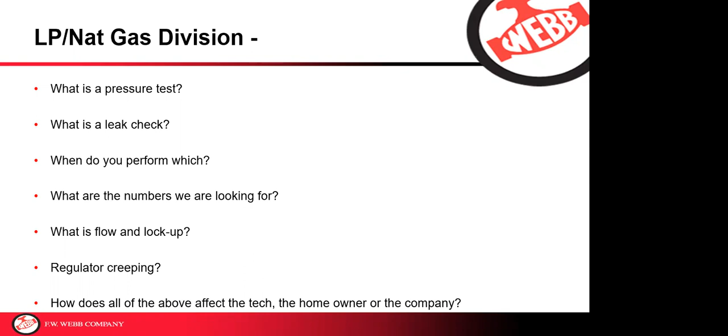The topics we're going to cover today are: what is a pressure test? What is a leak check? When do you perform each? What are the numbers we're looking for? What is flow and lockup? We'll also address regulator creeping and how all of the above affect the technician, the homeowner, and your company.

We're going to start with a small video from PERC, Propane Education and Research Council, which, just to let you know, you have great assets within these organizations, PERC, as well as others we'll talk about shortly.

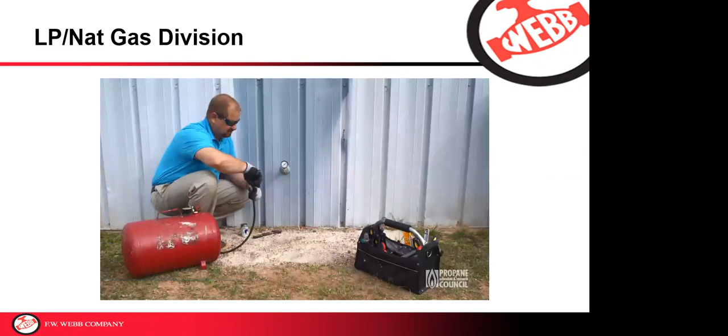The purpose of conducting a pressure test is to make sure the interior gas piping holds pressure while being subjected to an elevated pressure. The test is performed downstream from the point of delivery and prior to appliances being attached to the system. Typically, a gauge is connected to the interior piping stub-out location. The test must be performed using air or an inert gas to pressurize the system and then monitoring the pressure with the gauge. If a gas shutoff valve is installed and subjected to the pressure, be sure it's rated for the pressure being applied to it.

After a successful pressure test is completed on a new gas piping system, a leak check is required at the time propane is introduced into the piping system. A system leak check is necessary to make sure the gas system is free of leaks.

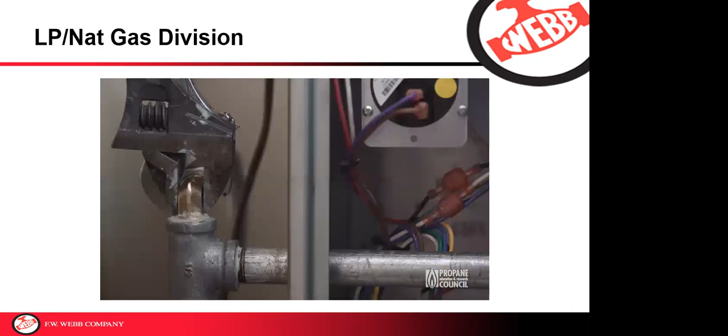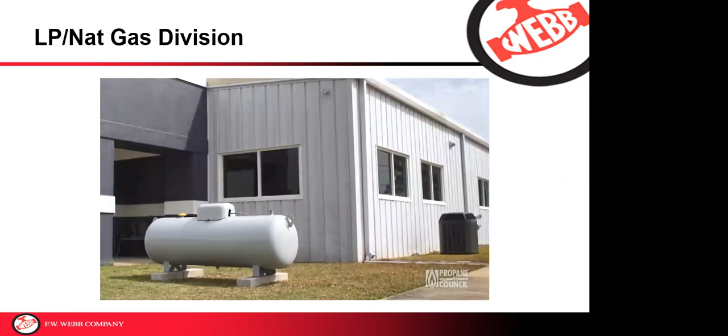Here, the technician is using a water manometer to conduct the leak check. However, there are other devices as well, such as the Magnehelic pressure gauge shown in use at the water heater. Before a leak check is performed, the appliances need to be connected to the gas piping system. The regulators need to be installed, and the gas piping needs to be connected to the propane container. Be sure to follow code requirements and your company policy when conducting a leak check.

If a leak is indicated by a drop of pressure during the leak check, a leak test is performed by applying a leak detection solution to the pipe fittings and connection points of the gas system. A leak detection solution will bubble to indicate the presence of a gas leak in the system. An electronic leak detector can also be used to detect leaks. Never perform a leak test with an open flame source.

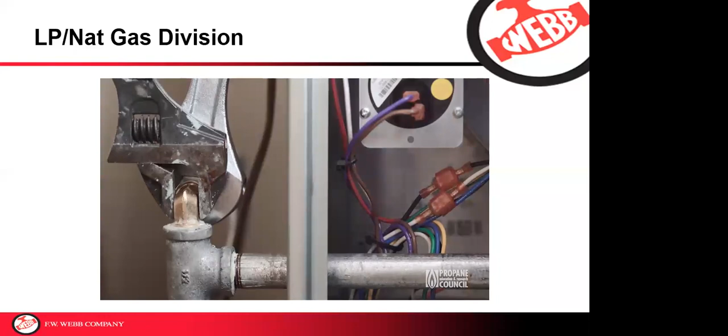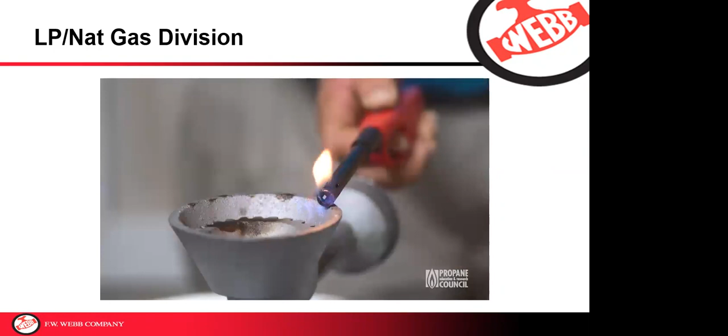After a leak is repaired, another leak check of the gas piping system is performed to verify the rest of the system is free of leaks. After the leak check is complete and the gas piping system has been purged, the appliance is ready to start up. The service tech is able to perform gas piping system flow and lockup tests with the same manometer position.

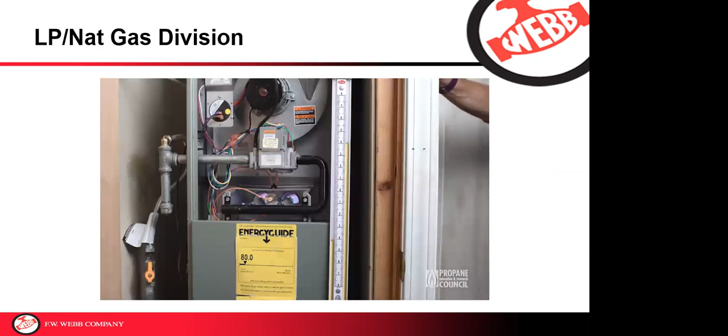Flow and lockup tests are typically performed on gas piping systems during startup to determine if the gas piping system and regulator are sized correctly for the intended BTU load, and that the regulator properly stops the flow of gas when there's no more demand on the appliance.

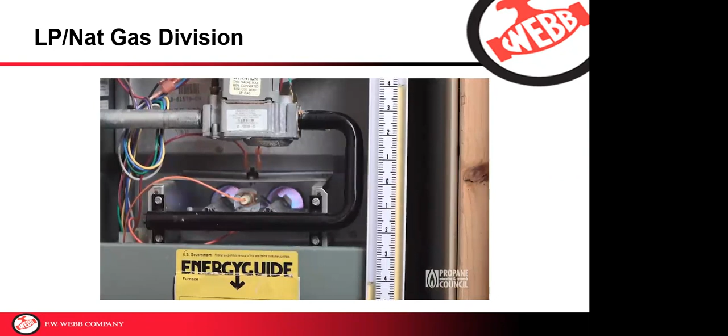In this example, the appliance inlet flow pressure is too low, as the furnace manufacturer, in this case, requires a minimum of 11 inches of water column pressure at the inlet. When the pressure is too low under flow conditions, the technician will check the pressure at the second stage regulator, usually mounted at the exterior building wall.

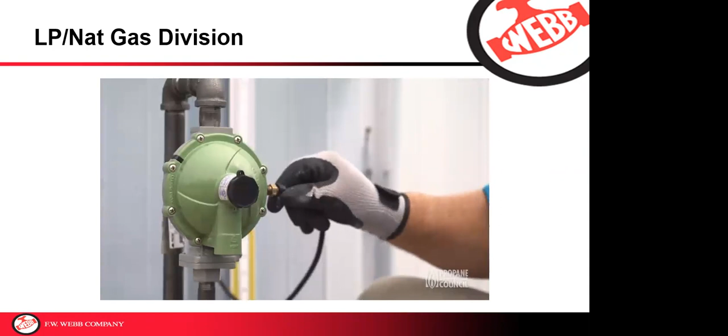Here, the service tech is using a manometer at the second stage regulator outlet to perform the flow pressure test on the interior portion of the gas piping system to verify a possible issue with improper interior gas pipe sizing, indicated by failed flow and lockup tests at the furnace.

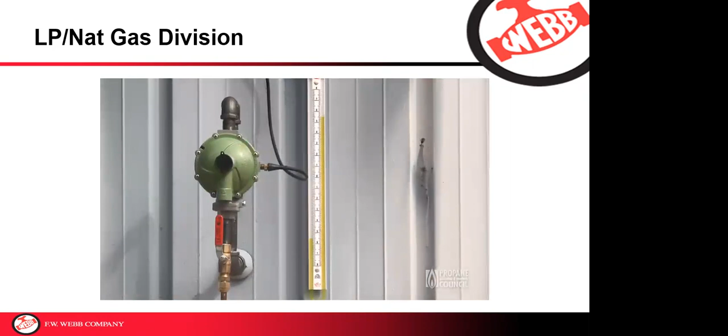In this example, the manometer check at the second stage regulator indicates it's supplying 11 inches water column to the building piping. Considering that 11 inches water column is normal pressure and the pressure is much lower at the appliance, a possible interior pipe sizing issue is indicated. All system checks and tests should be documented according to your company policy.

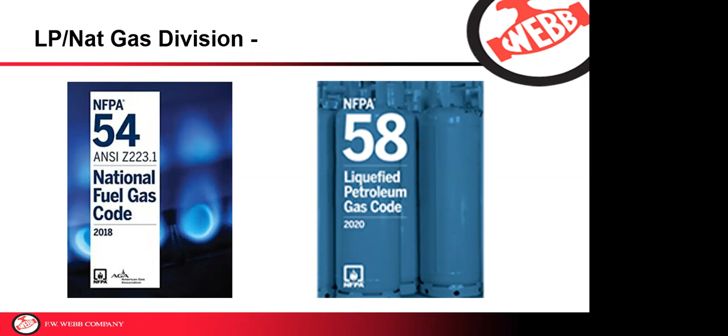Also, what we're deriving our information from is both NFPA 54 and NFPA 58.

First thing we're going to talk about is a pressure test. NFPA 58, by definition, describes that as an operation performed to verify the gas tight integrity of a gas piping system following its installation and/or modifications. In 6.13.3, it states that piping within the scope of NFPA 54 shall be pressure tested in accordance with that code. So make sure you're following each code, 54 and 58. And 54 is very specific when it comes to pressure test.

In leak detection from NFPA 54, Chapter 8, we have to keep in mind they're very specific about what we can use for our test medium. The test medium shall be air, nitrogen, carbon dioxide, or an inert gas. Never use oxygen for this test.

8.1.4.2 tells us that the test pressure to be used shall be no less than 1.5 times the proposed maximum working pressure, but no less than 3 psi, irrespective of design pressure. So even if you have a low pressure system working at 11 inches of water column, NFPA 54 tells us you must use no less than 3 psi.

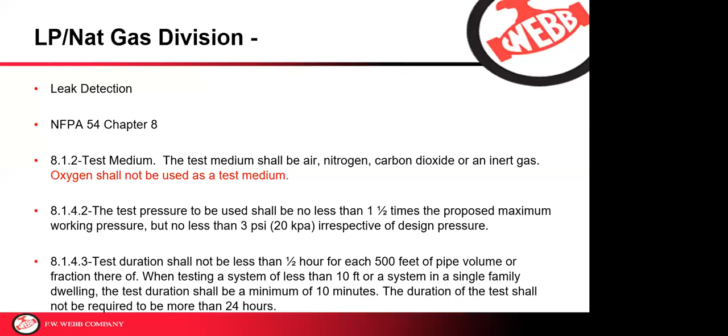A leak check by NFPA 54 in Chapter 8 says that is required immediately after gas is turned on into a new system, or into a system that has been initially restored after an interruption of service. Piping systems shall be checked for leakage. Where leakage is indicated, the gas supply should be shut off until the necessary repairs have been made, and then you must leak check again. So what is an interruption of service?

It could be a number of different things. Of course, a runout. If a customer loses pressure in the propane tank and they call you for a delivery, that is a runout and a leak check is required. To protect yourselves and your company, document your leak checks, as well as pressure tests for that matter.

Another interruption of service would be, for instance, if homeowners at a seasonal home decide they don't need their gas on while they're away and they shut it off. That does require a leak check. So somehow you've got to let your customers know that that is required.

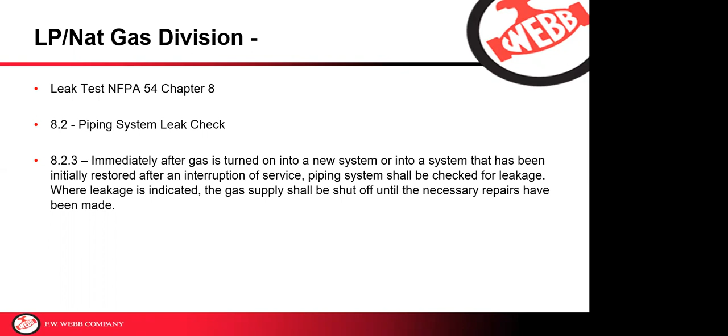Here shows a number of different leak check and pressure test pieces of equipment. It's highly recommended that your technicians have some of these things. The first one on the left is a simple low pressure gauge, reads up to 30 inches of water column - there's a couple of them there. On the bottom left is what we call a serviceman's friend. It's a great, inexpensive tool, and that's going to help your technician or driver tie into the system in a number of different places.

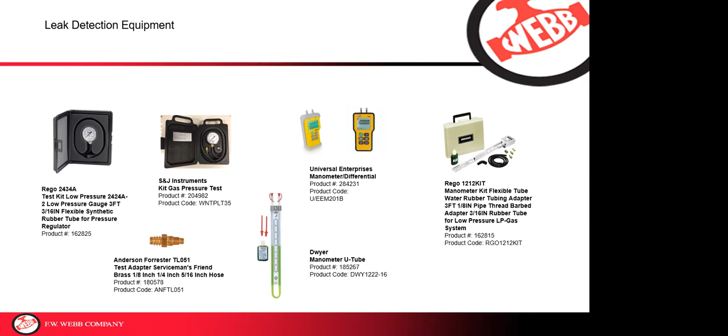Right in the center, those yellow pieces of equipment are digital manometers. Those are great, but keep in mind they do have to be checked for accuracy occasionally, so read the instruction manual from the manufacturer as to the intervals. The U-tube manometers are a great tool, and they don't lie. Unlike the gauges and the digital manometer that have to be checked occasionally, these U-tube manometers, as long as you zero that manometer, it is an excellent tool. And FW Webb carries every one of these pieces of equipment and others.

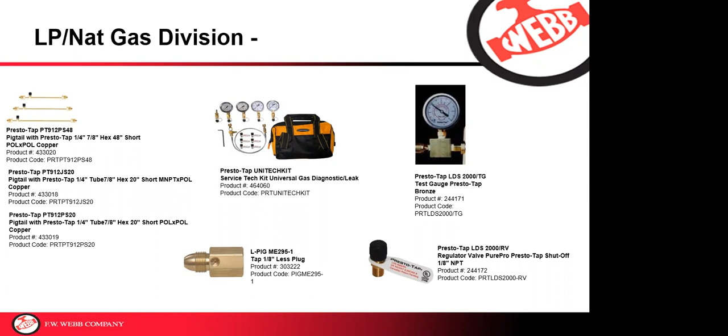In the center is a Presto Tap Unitech kit. We call it a Universal Gas Diagnostic and Leak Kit. This comes with a whip and 4 different gauges: a 300-pound gauge, a 30-pound gauge, a 5-pound gauge, as well as an inches of water column gauge. It's great for a technician, they really come in handy, and again you can tie into the system anywhere you'd like. The others are just some other tools available to you folks for your drivers and or techs.

A must-have on a service truck or delivery truck is a leak detection solution. These leak detection solutions are non-corrosive, which is very important. Do not be tempted to use anything else. Any cleaning agents have chlorides that can deteriorate the pipe or tubing, so make sure you're using a non-corrosive leak detection solution. You can use either the brush type bottle or a spray bottle.

These are a number of different gas sniffers. We have these available, they're a very handy tool to find that leak. If you're doing your leak check and you find that there is a leak, these will really help you locate that leak, repair it, and then again test that system. Very important, and document.

This RegO LP Gas Serviceman's Manual is a great tool. In it, besides line sizing charts, there are descriptions of how to do proper line sizing using the longest length full load method. There are also excerpts from NFPA 54 and 58 on how to perform a proper leak check at different parts of the system. So it's a great tool, and if that's something anybody needs, please contact your local FW Webb and we can provide them for you.

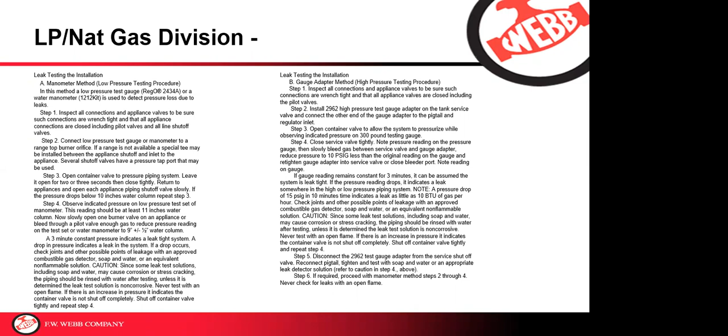Disconnect the test gauge adapter from the service valve, reconnect the pigtail, tighten, and test that connection with your non-corrosive leak detection solution. If required, you may want to proceed with the manometer method that we spoke of earlier.

This slide talks about the high pressure test method with service valves equipped with a pressure test port. Again, inspect all connections and appliance valves to be sure connections are wrench tight, that all appliance valves are closed, including pilot valves. Install your pressure test gauge on the test port downstream of the tank service valve seat and upstream of the pigtail and regulator inlet.

Open the container valve to allow the system to pressurize, observing the gauge reading on the 300-pound gauge. Close the service valve tightly. Note the pressure reading on the pressure gauge. Then, as we said before, slowly bleed out 10 psi off that tank pressure. Retighten the gauge adapter into the service valve or close the bleeder port. Note the reading and document it. If gauge reading remains constant for 3 minutes, it can be assumed the system is leak tight.

Just as our last high pressure method, we're going to follow the same rules. Check the joints and other possible points of leakage with an approved combustible leak detector or non-corrosive leak detection solution. Never test with an open flame.

Just as in the other tests, if there's an increase in pressure, it indicates the container valve is not shut off completely. Shut the container valve tightly and repeat. Now disconnect the test gauge from the service shutoff valve, or leave it in place if desired. If the gauge is removed, plug the opening and check it for leaks.

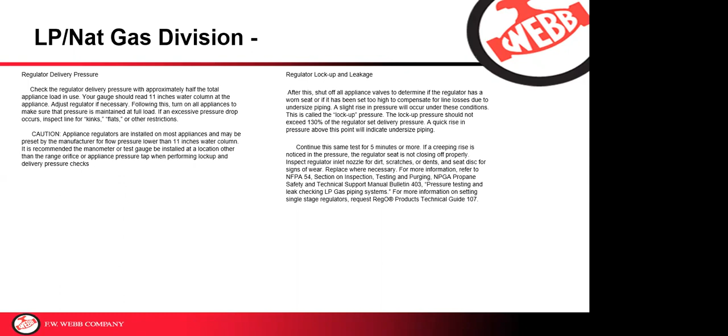Some things we're going to discuss: how can what we have discussed today affect you? How about your customer? How about the company you work for? What we've discussed really is all about safety and protecting yourself. In the event there happens to be an accident at a particular home or business, you performing these tests and checks properly and documenting them can protect you, and it's very important that we protect our customer as well.

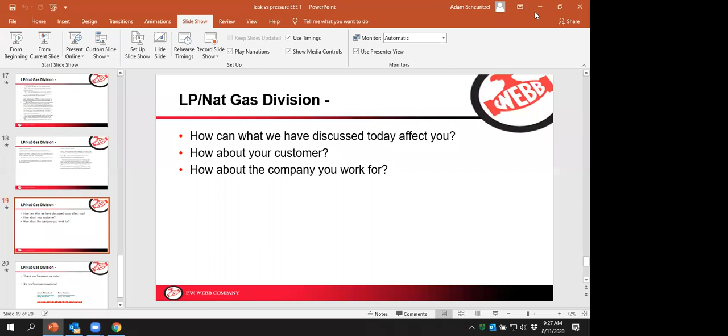We're about to show you a video that's going to describe, we're going to talk about pressure testing, perform leak checks, and perform flow and lockup. I apologize for the technical error. Here we go, that PERC offered us.

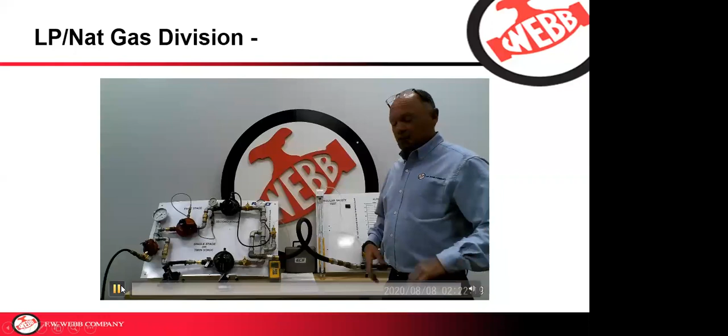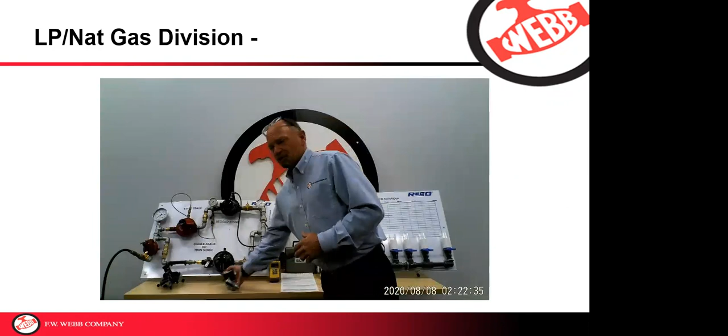They talked about pressure tests and did a great job of showing an example of how to pressure test piping. Now remember, pressure tests are required for new piping, or if you add piping to an existing system, that new section of piping needs to be pressure tested. Again, pressure test means, by definition of NFPA 54, you must test this piping system at 1.5 times maximum allowable working pressure, but not less than 3 psi.

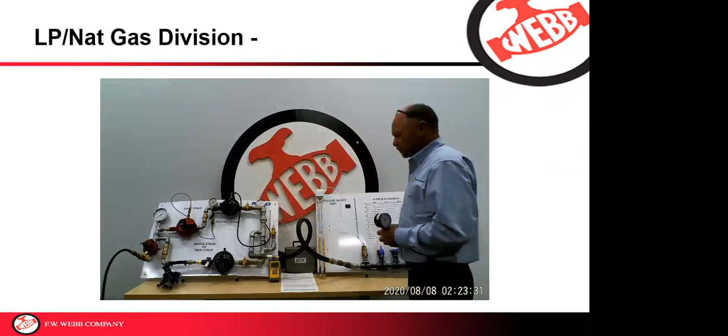So if you're going to be delivering 3 psi into a piping system, make sure that the appliances are disconnected. All cook stoves, dryer, water heater, boiler, furnace, whatever, that's got to be disconnected per 54. Also keep in mind that your valves have to be rated to accept that kind of pressure. If they're not, the valves have to come off. You have to plug or cap the piping. So disconnect your appliances per code. You don't want to damage a gas valve on a brand new appliance by putting too much pressure to it.

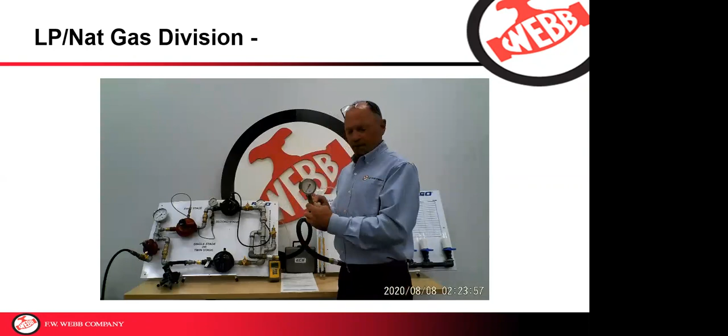They use this pressure test gauge assembly that I have right here, and this is great. They threaded this directly onto the 3/4 inch stuff that was sticking out of the building. If in fact you've got a propane system that's only using copper tubing, you can just thread another adapter in there and use the same kit, just with an adapter on it.

Keep in mind when you are doing pressure tests though, you want to keep your gauge at no more than 5 times the test pressure. So an acceptable gauge on a pressure test for a low pressure system will be up to 15 psi. This one right here I have is a 5-pound gauge, which is going to really give me a quick indication if there is a leak in the pressure test. So keep that in mind.

The code also references the duration of the test, and that's based on the length of piping you have. If it's just a single dwelling, and that gas piping only requires about a 10-minute test. So keep those things in mind.

If in fact your pressure test shows a leak, you need to make the repair and retest that whole system and document it. So the pressure test is very important, and it's very specific in NFPA 54.

Don't forget, do not use gas. Do not use oxygen. You can use air - in the video, they use the air tank to pressurize the system. You can use nitrogen or CO2, but do not use oxygen.

So that was our pressure test portion. What we're gonna do next is talk about leak check. And what I have here are regulator boards, and this right here is mimicking the load or appliances in a customer's home. So we're gonna do a couple different types of leak checks.

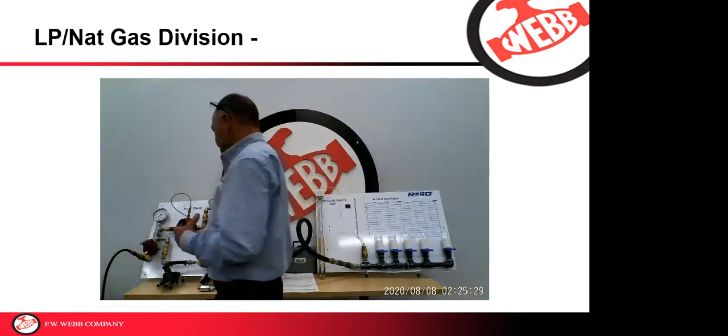What I'm gonna start with is talk about our gas pressure. Propane pressure is directly affected by temperature. So today being 80 degrees, we know that the gas pressure inside of a propane tank is gonna be about 140 psi. So I'm gonna start with that.

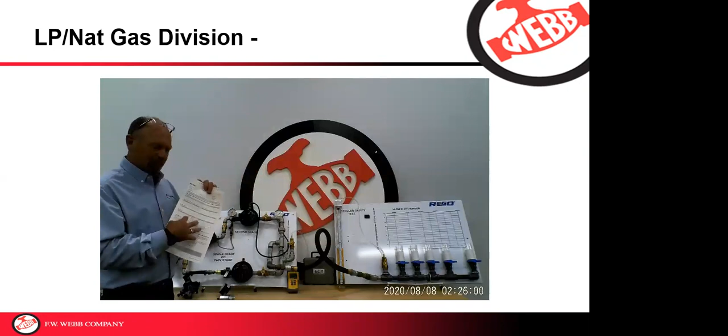The reason I mention that, and it's so important, is when your technicians or drivers are filling out a leak check form, they must document if they do a test, whether it be pressure test, leak check, all of this stuff. There's even spots for flow and lockup, which we'll get to. Make sure it's documented and signed.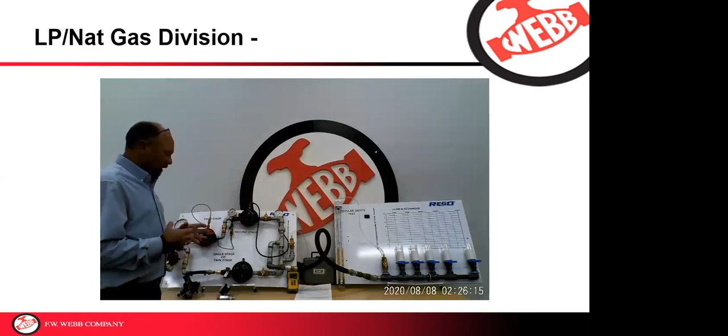So at 80 degrees Fahrenheit, we've got about 140 psi in a tank. If it were in fact 0 degrees Fahrenheit, there would be about 28 pounds of pressure in a tank. So make sure that they're doing this thoroughly and writing down the gauge readings that they're getting. Don't just make them up, because ultimately that can come back and bite them.

So I'm going to turn our source on. I'm using nitrogen. We are in a building. So we're going to manipulate this and give our system 140 psi tank pressure. So we'll work its way up to 140 psi.

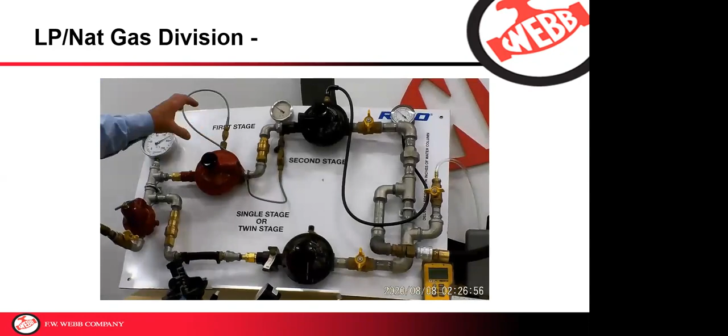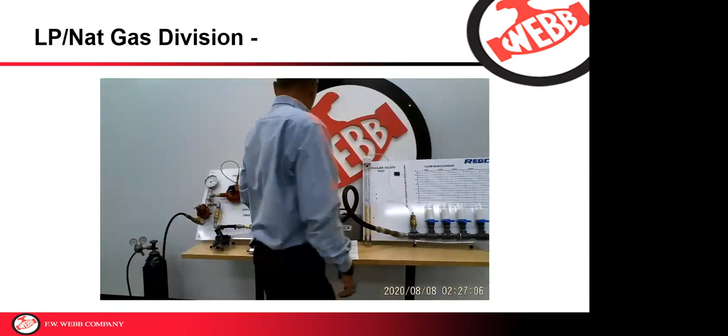The tests we're going to do are going to be through our first and second stage regulators. We could do the same test through our twin stage regulators. So we have 140 psi in our system, going through our first stage regulator, which takes our tank pressure and drops it down to 10 psi, to our second stage regulator, which takes the 10 pounds and drops it to 11 inches of water column, which we're just over 11 inches on the outlet of our second stage regulator.

So now I'm going to introduce the gas to our system and up to our appliances. Opening valve slowly. We're going to show that we're a little bit over. We're right about 12 inches of water column on the outlet over at our appliances.

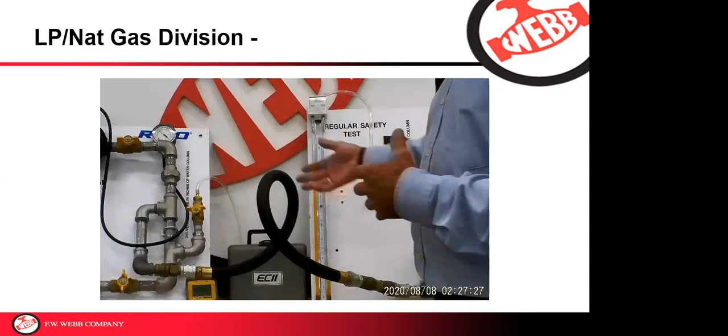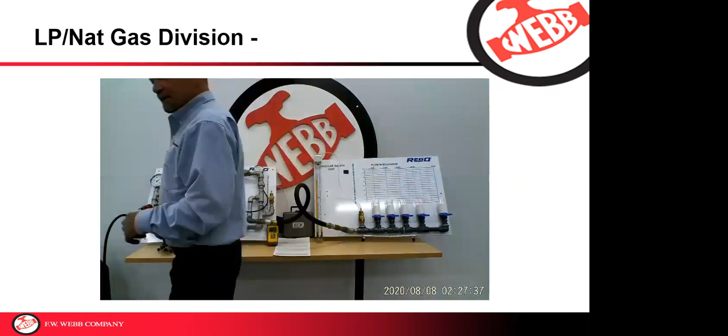So to perform our leak check, we're going to do first our high pressure one that's specified in NFPA 54. And this is at 8.2 of NFPA 54. So I'm going to shut our gas off as it says in code.

Then what they want us to do is drop our tank pressure 10 psi. So we're at 140, I'm gonna drop that down through the bleeder of my Presso Tap gauge setup. We'll drop it down to 130 PSI, and the reason we're doing that, besides leak checking the system, we're also testing the integrity of the service valve of the propane tank.

After 3 minutes, if we find that the gauge is increased in pressure, we know that the service valve is not closing fully. After 3 minutes, if we find that our tank pressure is less than the 130 PSI, we have a leak. Then it is our job to find that leak, repair it, and again, retest.

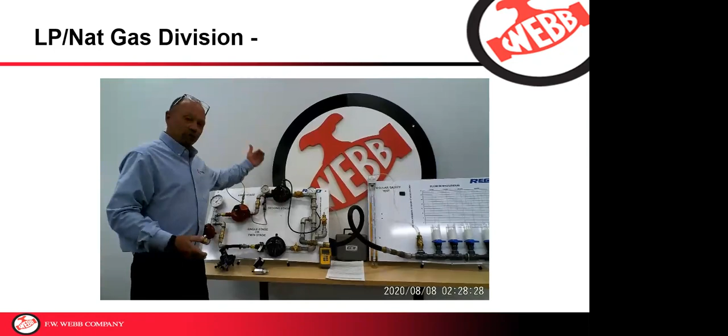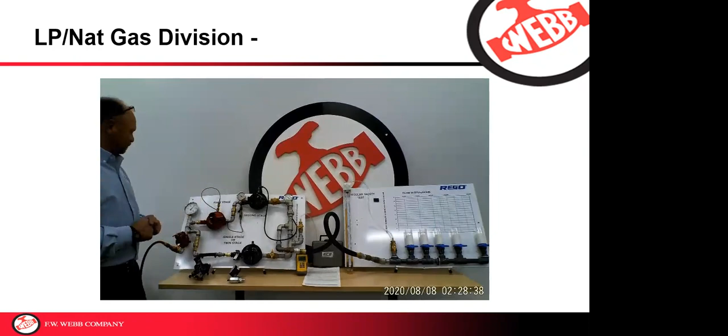So that's how we do a very simple high pressure leak check. We'll do this right at the tank with a T-block, among a number of different means to do that. Newer tanks nowadays do come with a test port in the service valve, which you could utilize to put a Presso Tap fitting into, or a serviceman's friend, and attach your gauge to it.

So it makes it very easy. You don't have to disconnect the pigtail and get the chance of any flaking of copper into your first stage regulator. So it's a very, very handy tool. So that's our high pressure leak check.

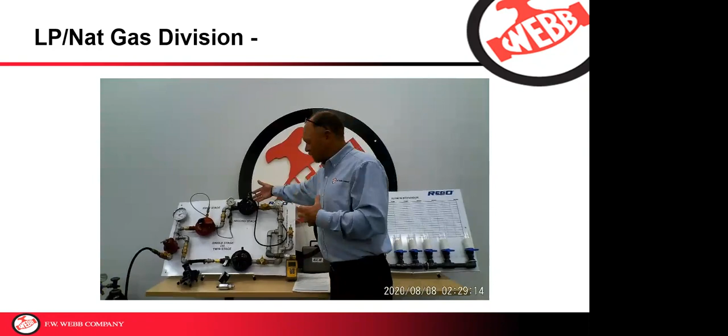We determined we have no leaks. Now we're going to go in the basement, and for that matter, we could also do it at the outlet of our second stage regulator, again delivering 11 inches of water column. This one's up a little bit, almost 12. We can do it at the outlet of the second stage regulator or at our integral twin stage regulator.

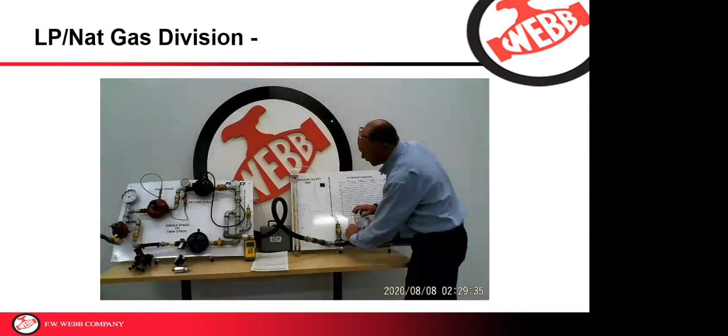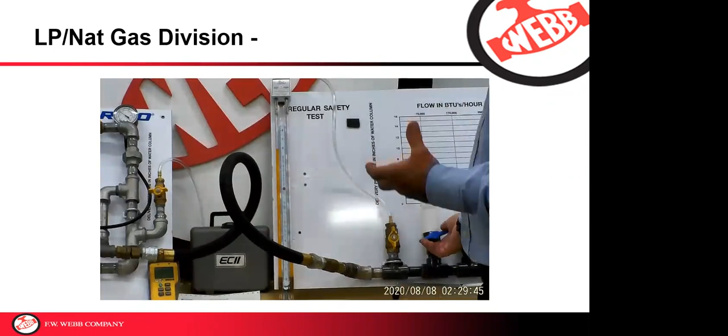I'm going to do it using our water manometer. So I've shut the source off, pressurized the piping, shut the tank off, just as it says in 54. Then I'm going to drop some pressure. I'm going to create a leak, get the pressure in our system downstream of the second stage down to 9 inches of water column plus or minus a half an inch. Again, we're doing two tests. We're testing for leakage and we're testing for the integrity of the service valve. We're going to drop that down so that regulators are completely open.

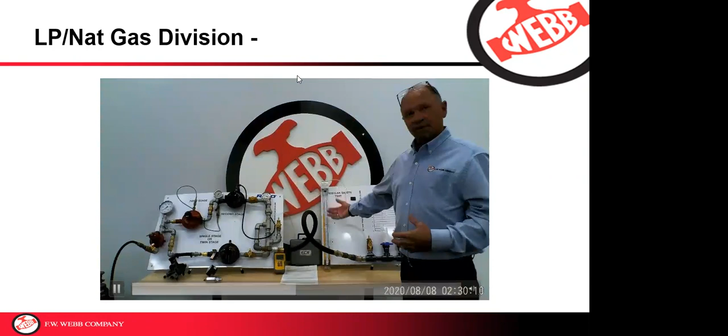A little bit more. 9 inches of water column. So we're going to watch this for 3 minutes, or you can start your paperwork, come back in 3 minutes, and determine if we're still at 9 inches of water column. We have determined that the piping system is leak-free. And then we can turn our tank back on and light the appliances.

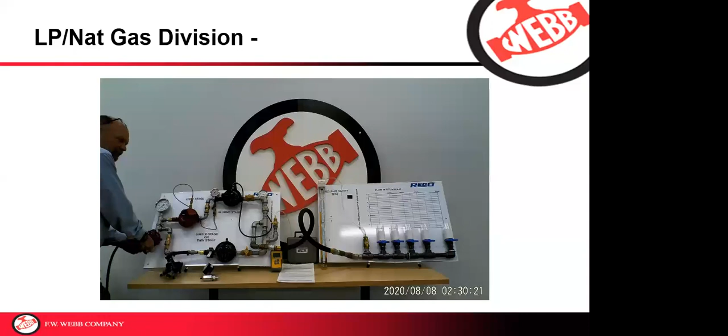Make sure you finish your paperwork, have it signed if you can. Have your technician or driver sign it so it's an official document. This right here is called a gas system check. And this has all the information you need about the customer's appliances, their home, their address, the tank, serial number, what size tank, whether you did a pressure test or not, and you can document what the starting pressure was, the ending pressure, etc. There's also spots in here to document what you have for regulators.

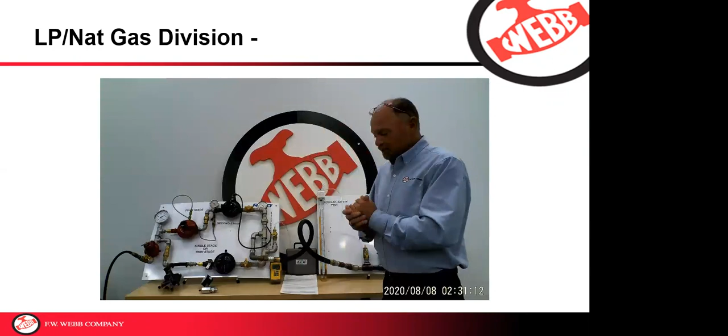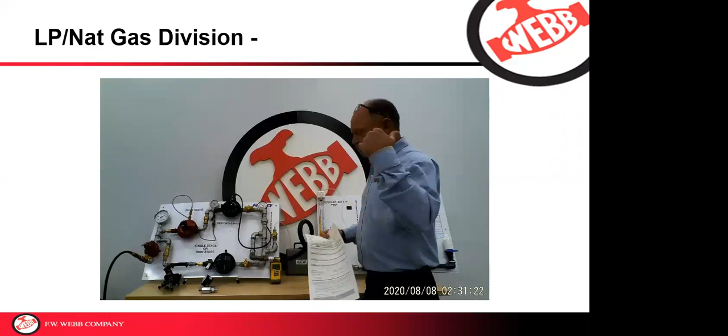It's important to put all the appliances that you have on this gas system check also. In the event that while you're not there, a homeowner or someone else comes in and installs another appliance, and then something catastrophic happens, knock on wood that it doesn't, but if something catastrophic happens, you're going to be in court and you can produce this document that says they had a water heater and furnace and that's it. There was no fireplace when we were there, and that may have been what caused the incident. So very important to do these tests, but as important is to document them.

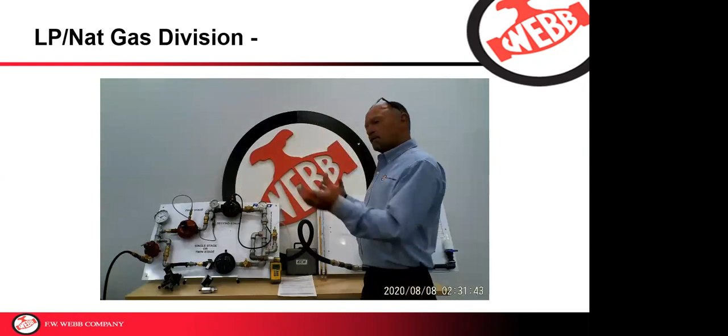The next test we'd like to do is the flow. And really what the flow is, we're just trying to determine if in fact our system can provide the proper amount of pressure all the way to our appliances. So we're going to do that. We know what our pressure is at the second stage regulator and over at the appliance. And code says that we're going to introduce about half the full load of that system. So we're going to say there's a 350,000 BTU load on this system. So I'm going to open my 175,000 BTU load.

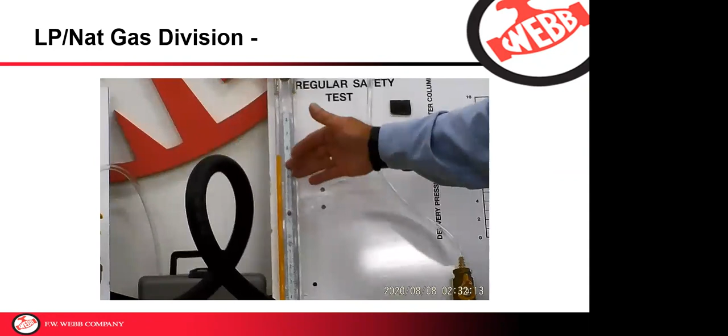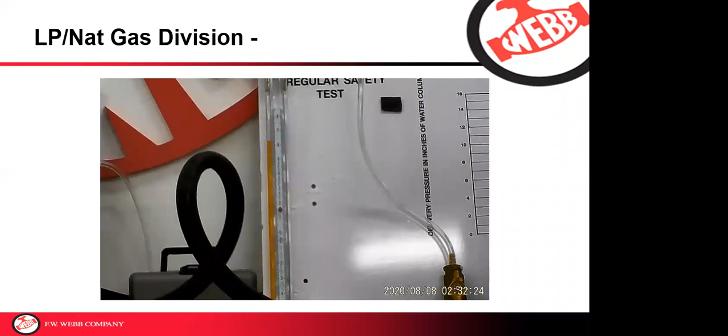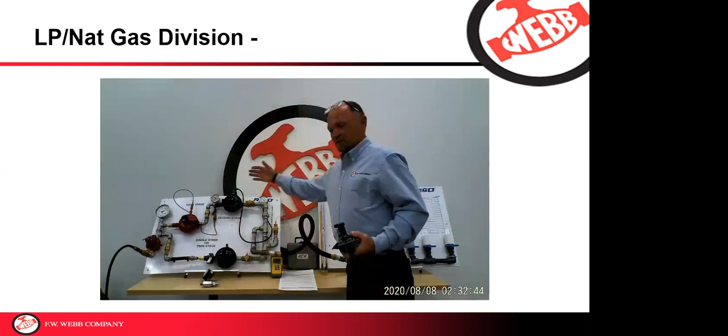There's an orifice in here that will replicate that. I'm going to open that. And I see that our system, the regulators and our piping, is still delivering 11 inches of water column, which is very, very important. But while we're here, we can do a lockup test at the same time. So we've got a load going, we shut the source of gas off, and we realize that it doesn't lock up higher than UL 144 states. UL 144 states a second stage regulator must lock up or close bubble tight within 120% of the set pressure. So if this is set at 11 inches, our lockup cannot exceed 13.2 inches of water column, which we're well within that range.

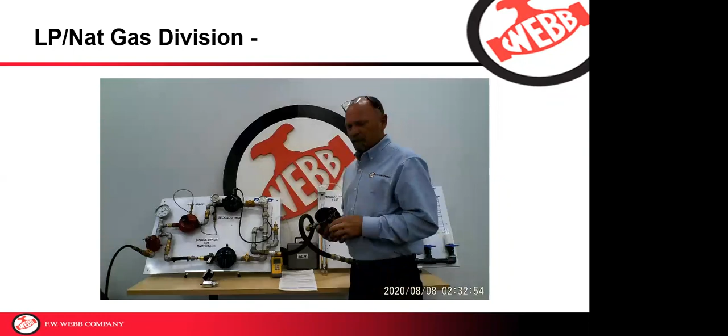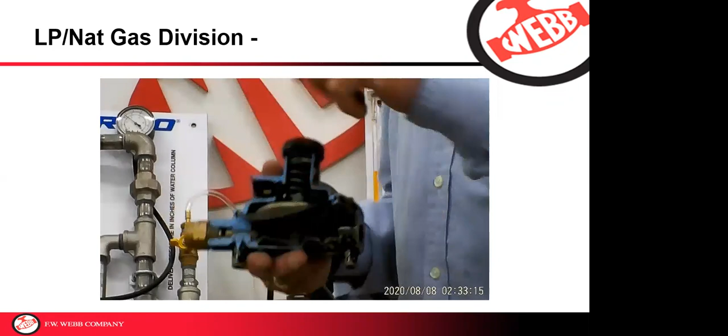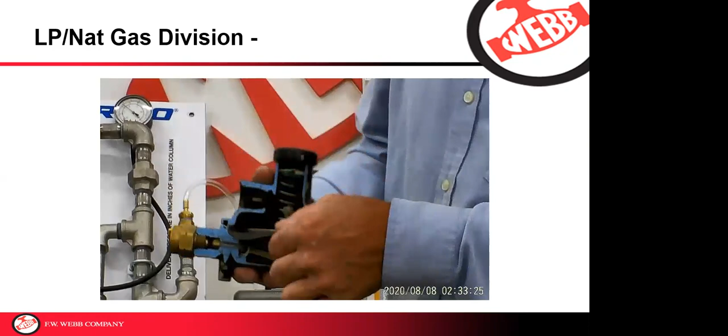Lockup, the term, is sometimes misunderstood, and I want to just explain it real quickly. This is a simple regulator, a cutaway regulator by Rego. But right now, this regulator is trying to deliver gas. The spring pressure has overcome the pressure underneath it. So while gas is flowing, the regulator is open. Once the appliance shuts off, this regulator is going to lock up or close bubble tight. The appliance is running. As soon as you shut it off, the pressure underneath the diaphragm overcomes the spring pressure, closing the regulator or locking it up. In this, while it's locked up, it will show that the seat disc presses against the orifice, closing this regulator. Again, they call it locking up bubble tight.

So again, second stage regulator is required to lock up at 120% of set pressure at 10 pounds inlet. The first stage regulator is allowed to lock up at 130% of set pressure.

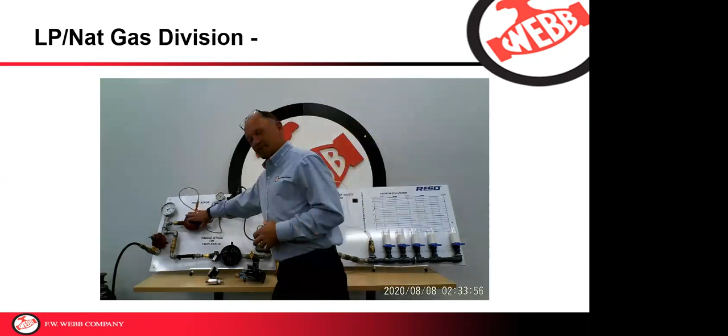So this should never lock up. If it's set at 10 psi, it should never lock up at more than 13 pounds. So that's really important. We've determined, given our piping system, flow and lockup is really good. We're all within the parameters we're looking for, per code and per UL listing.

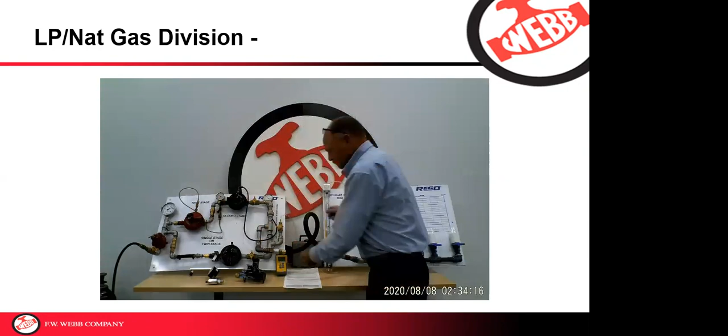So now I'm going to manipulate it. I'm going to install undersized piping and see how the regulator and the piping system react.

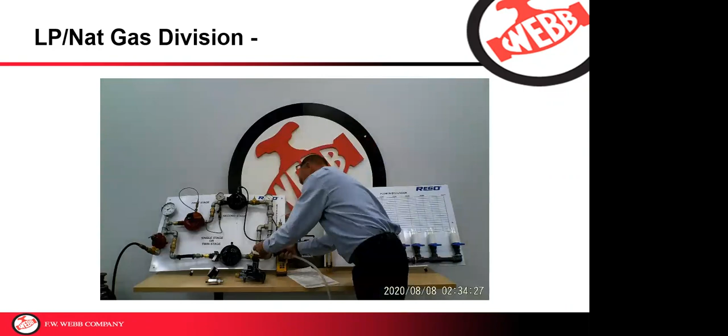To perform these tests, you can use the gauge installed on our second stage regulator, or a digital manometer. It's a great tool. Or U-tube manometer, there's a number of different ways we can check.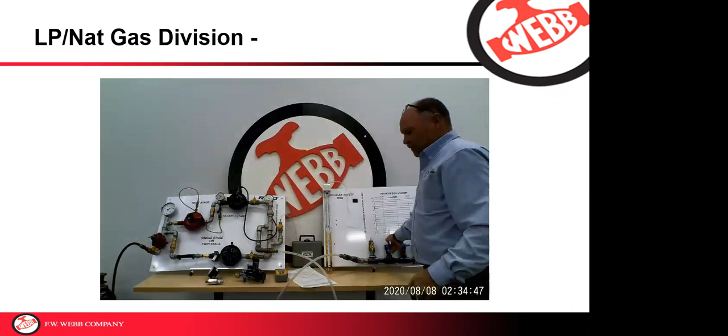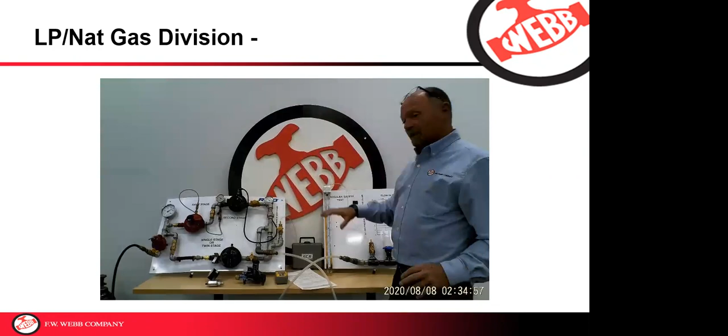Now we've installed undersized piping. Let's see how the regulators and the system react to this. It is my recommendation that you do your lockup test at one of the furthest away appliances, and I'll explain why coming right up.

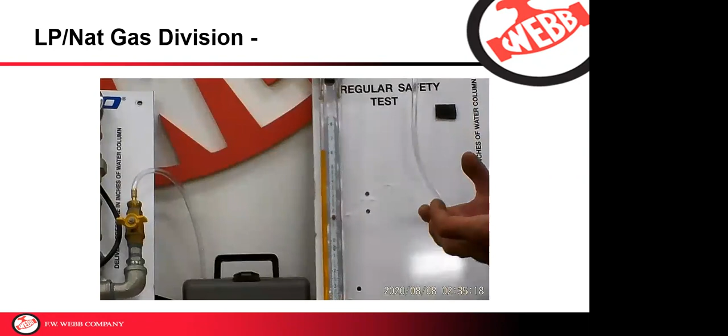We've got an inches gauge installed on our second stage regulator, reading just over 11 inches of water column. I'm going to bring the gas over here. So now with our undersized piping, remember our flow with the proper size pipe was still flowing at 11 inches of water column. I'll open the same flow, 175,000 BTUs.

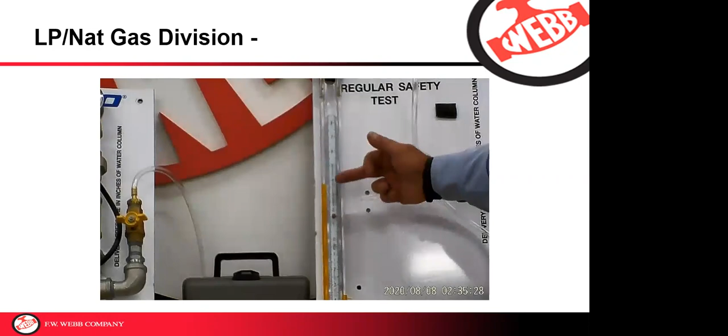Notice that we're just under 8 inches of water column. Not acceptable for most high efficiency appliances. Modulating gas valves are going to sense that low pressure, probably flash a code at you, and you'll get a no heat call, no hot water. So we're flowing not enough just because of our restriction in the piping. Our regulator still says it's delivering enough pressure.

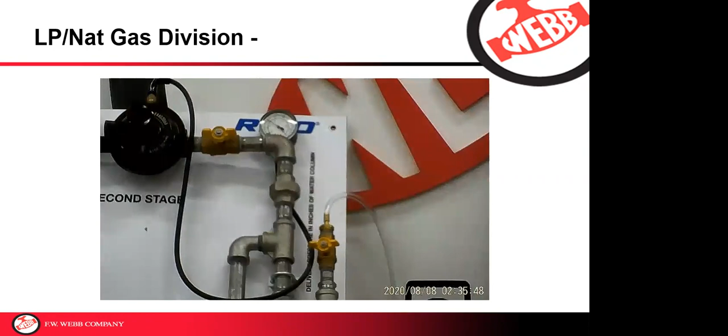Watch what happens when it locks up. We're going to see a spike. You hit almost 14 inches of water column lockup. That is well beyond the limits allowed by code and by UL.

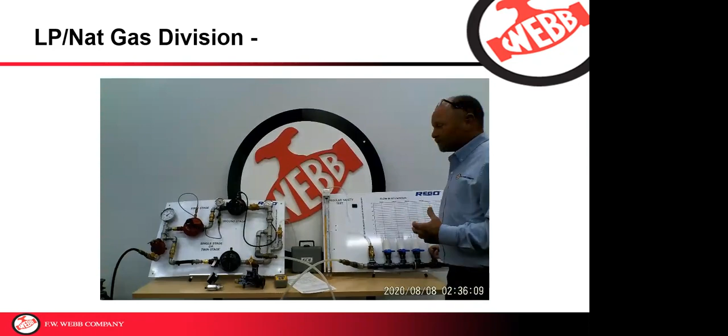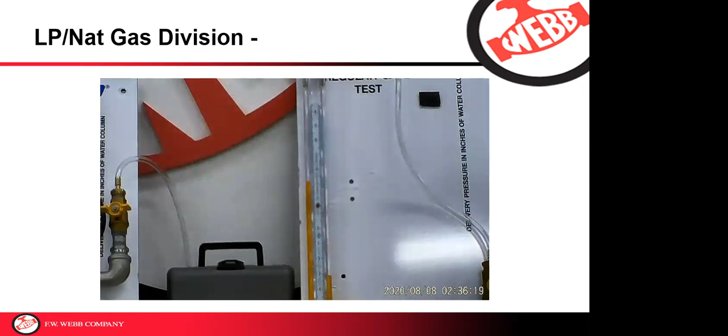I'm going to open our full load at 350,000 BTUs and see how the flow and lockup is then. Again, our second stage is delivering what we're supposed to, but we're now under 7 inches of water column flow. In our lockup, that hit 14 inches. So again, not at all acceptable.

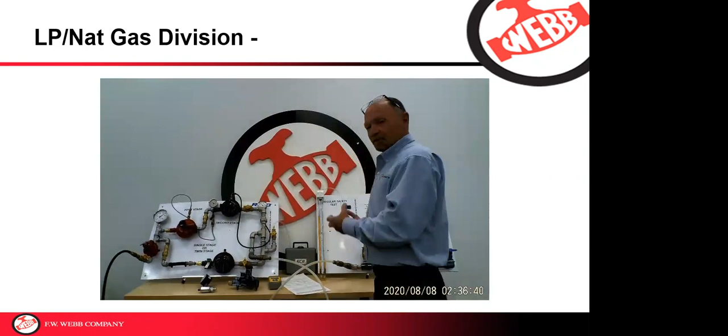We can learn a lot just by doing our flow and lockup at the right place in the system. We've determined, even though this may have been buried in the walls, at some point they may have added too many appliances to the piping. There may be a kink or an obstruction in the piping. So this is why we do our lockup, especially downstream of our second stage regulator, down at the appliances.

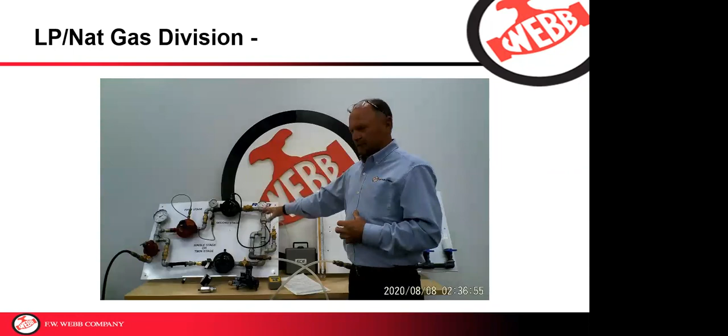UL 144 also mentions something else which is very important to regulators. Any final stage regulator is required to have a relief valve. It doesn't have to be integral like these are in our Rego regulators. It can be installed downstream of the second stage regulator, but it's designed to protect our downstream piping and appliances.

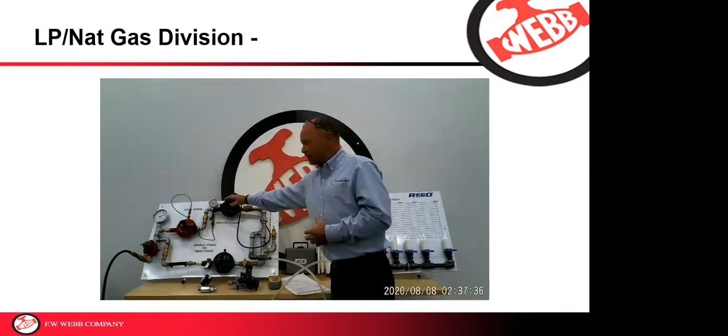The relief valve settings on these regulators are very specific. The first stage regulator, at 140% of set pressure - again, that's set at 10 pounds - so at 14 PSI, that has got to start relieving and protecting our downstream piping. Our second stage regulator gets a rating of up to 170% of setting. So for instance, if this was set for ease of math at 10 inches of water column, at 17 inches of water column, this must start relieving.

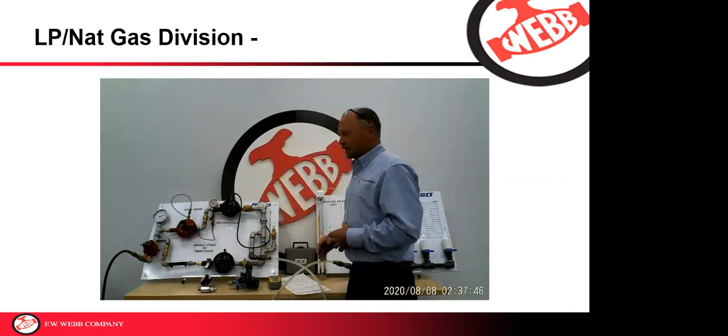Again, all that is to protect our downstream piping, protect our appliances, and the people who are in the building, as well as yourselves. So that's just a short demonstration of how we perform leak checks, flow, and lockup.